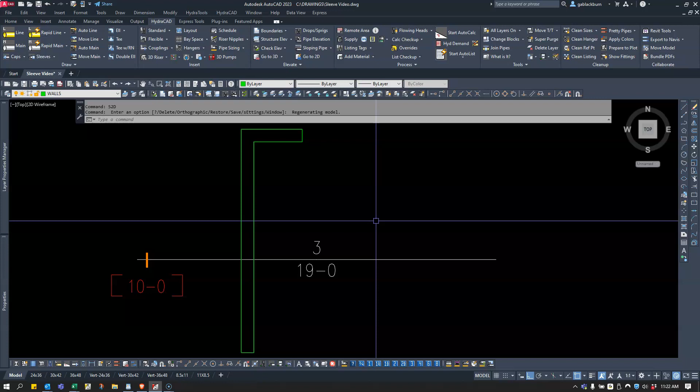And show you how to have something show up while you're in 3D and you go to your BIM model and everything. So I have a drawing here. I want to first draw the 2D sleeve.

To do that, you're going to go to the hangers toolbar. That will load this one up, and then we're going to pick this button, fourth from the end. First off, it's just going to give you a couple bits of information telling you that if you adjust it, you have to just do a regen, and because it's dynamic, it'll update automatically. So that's what that means.

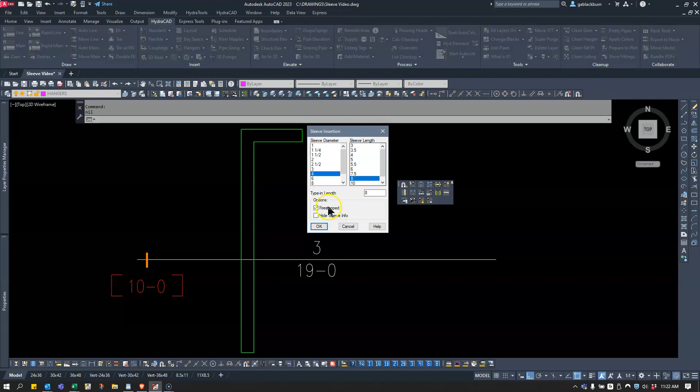First question on this column asks for the sleeve diameter. I assume we would go with a 4-inch sleeve diameter for this, and the width of the wall is 8 inches, so that's why I have 8 inches selected here. I have the firestopped option turned on, and when I click OK, it will ask me to select a point where the sleeve is going to go.

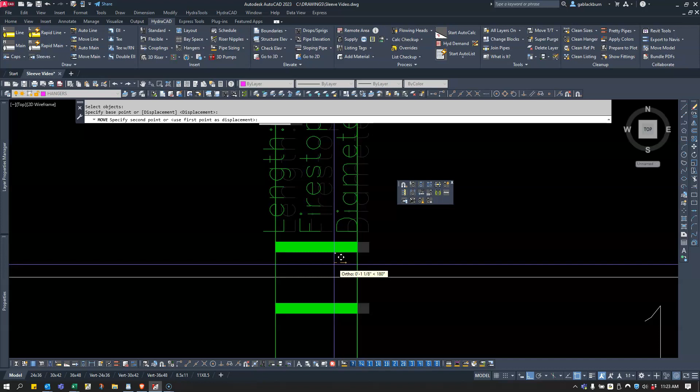So I'm going to try to find the midpoint of this pipe here. I'll guess about right there, and I was off a little bit, but all I have to do is if I want to center it up, I can just kind of grab this and just move it over, and I make sure that my ortho is turned on, and now it draws everything perfectly.

You can see the dynamic information here. It's telling you that length is 8 inches, the firestop is answered yes, and the diameter is 4 inches. So you can see that information there. And again, as you adjust values, doing a regen will update this automatically.

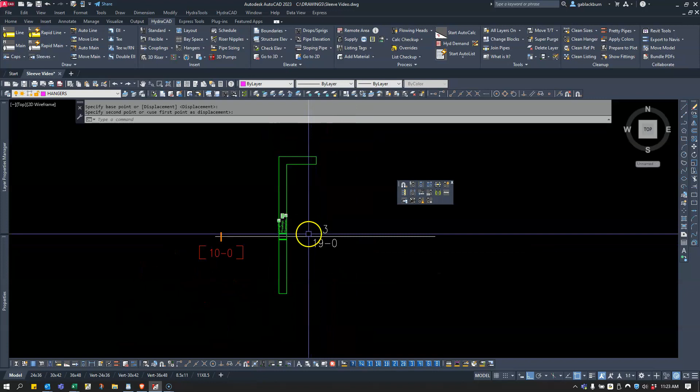Now, this doesn't help much because you can see we have this 19-foot long piece of pipe. It's elevated to be 10 feet. Let's see what this looks like in 3D. So I'll type in S3D and it will raise it up to 3D.

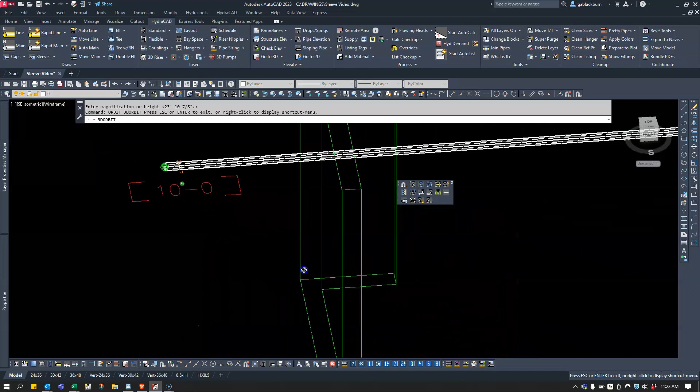And you can see our sleeve is still showing on the floor because again that was a 2D sleeve, and our pipe, we don't really see anything different here. If I orbit around, nothing to represent a sleeve. So I would say that we have to do something to be able to show an object in 3D so that when you make your BIM model, you would be able to see your sleeve show up there.

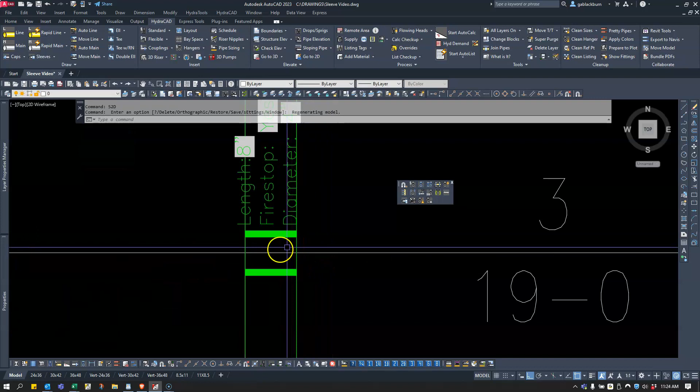So let's drop it down to 2D. I'll type in S2D, and here's the trick to get this done. I'm going to draw another piece of pipe. Now it can be any layer that you want.

I'm going to just draw it in the underground layer so that way it shows up a little bit differently. We're going to have some blue pipe here, and all I want to do is draw a line that represents where the sleeve is going to go. So I'm going to draw a line that starts from the intersection of this wall, and I'm going to draw it to the intersection of that wall, and I'm drawing it right on top of the existing pipe.

Now, this technically won't work. If I try to make a 3D model, it'll tell us that this 8-inch underground pipe is not being raised up to 3D. So let's change that.

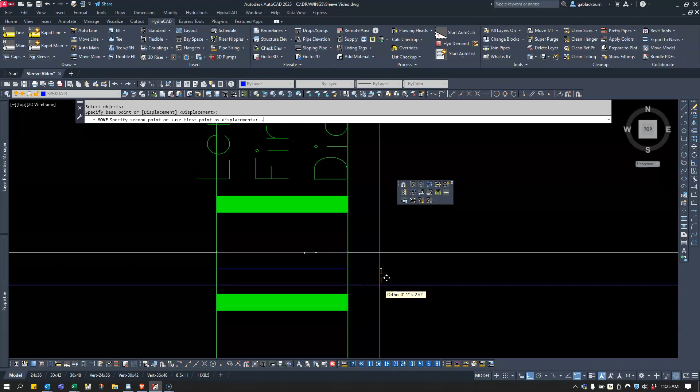Now, the problem is I can't have these two pipes drawn right on top of each other. So what I plan to do is I'm going to move this pipe south by about an inch, 1 inch, and now I have my blue pipe drawn next to my white pipe.

So this is just to give an estimate of where the sleeve is going to go. It doesn't have to be exact. We're just trying to show that there's something there.

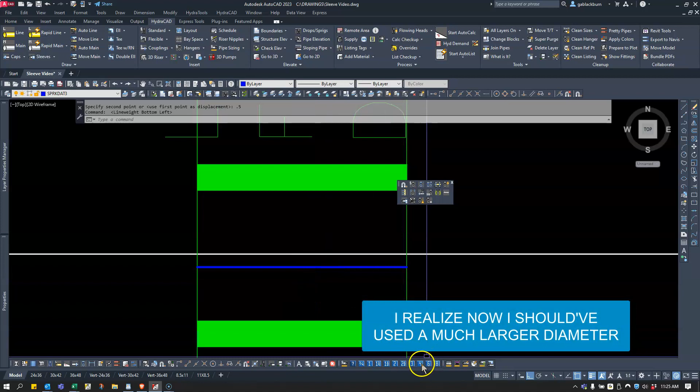Next, I'm going to size this pipe to be a 4-inch diameter pipe. We can see here it's 4-inch diameter, 8 inches long, and I need to elevate this pipe too. So I'm going to type in AFF, tell it the elevation of that pipe is 10 feet, and click insert.

If I draw the tick mark across both of them, this tick mark will be the same as that one and both will get elevated, but I like the positioning of this. I don't like this right on top of it. It's getting very congested in this area.

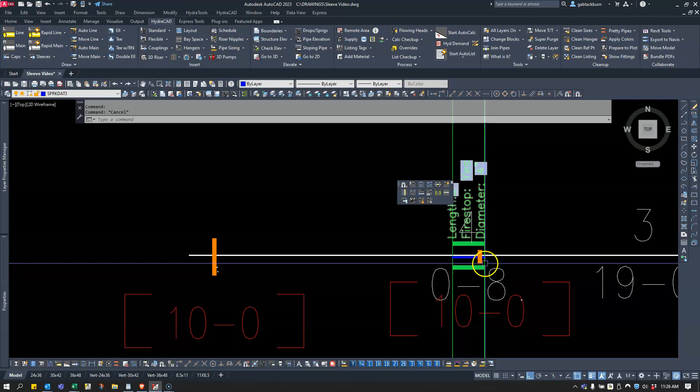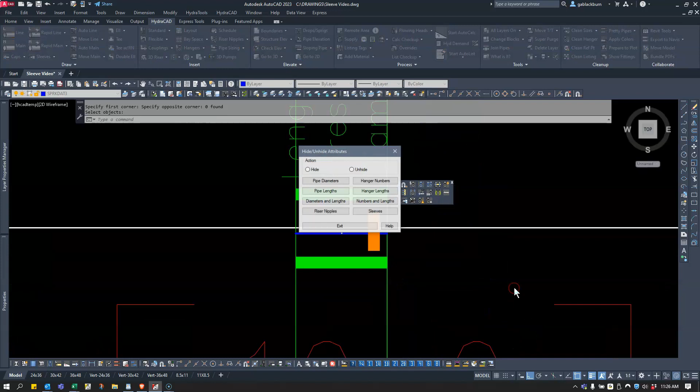So let's do a couple things here. First off, I can hide this text using the command HAT, for hide attribute. I'll tell it I want to hide both the diameter and length of this dimension, and when I hit enter, it goes away. It hides it. So it's there, it's just hidden at the moment.

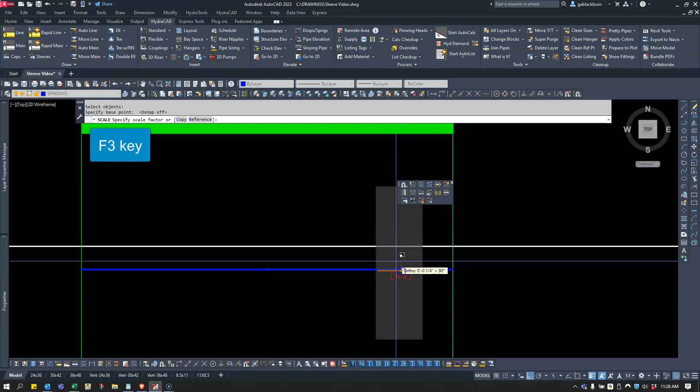Secondly, I want this to be scaled down much smaller, especially I don't want it touching this white pipe. So I'll use my scale command, tell it scale, this option, and we'll go from here. Let's turn off my O-snaps and we'll go like this, making this about that wide, so it's only touching the blue pipe.

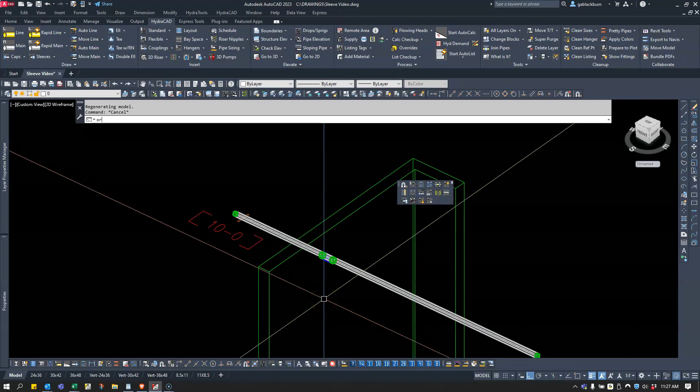And when I make my 3D model, if I show 3D, we'll see that there's a little blue marker, that represents our sleeve. If I orbit, it'll only orbit around that one object. But if I orbit again, we'll see that it's moving along with the pipe, and for all intents and purposes, it looks like it's right on top of the pipe.

If you zoom in real tight, you'll see it's off by half an inch. But, you know, like I said, we want to show that there's something there.

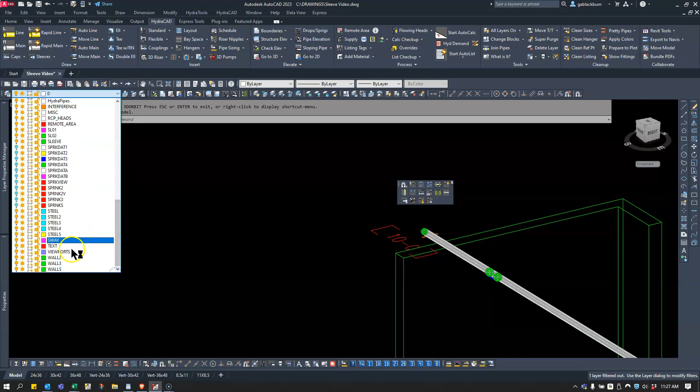I'll go to an X-ray view here and isolate this layer, so lay ISO, and I'll lay ISO this and this. I was trying to hide the fitting object here, but let's just delete it for now. Again, you can see here, if we turn on our X-ray view, that there's something there.

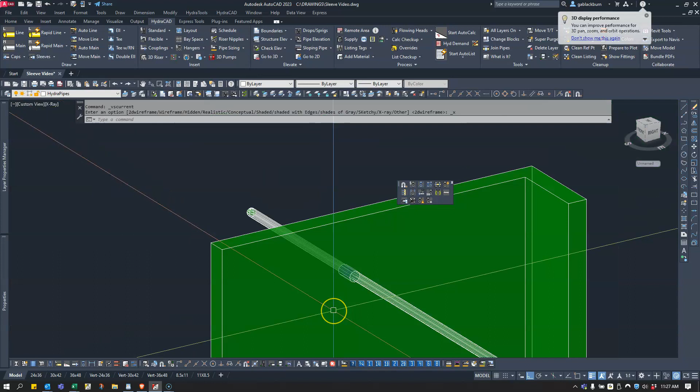All right, so that's how we're going to show the sleeve in CAD. And now if I make my 3D model, I'll save my drawing and export to Navis.

That's probably okay because we don't have any heads there. I will now open this drawing, file open, and go to my sleeve video drawing.

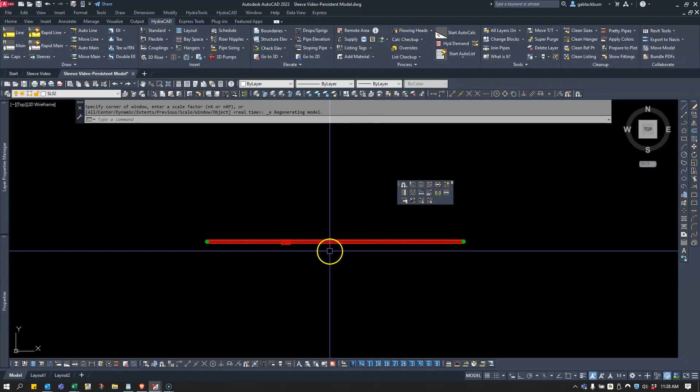I'll export, and it does show, you know, obviously when you export your BIM you're going to get all the pipe. But if I orbit around here, you'll see that it shows the sleeve sitting right on top of it there. There's no walls that I exported, so that's why we can't see the wall, but you'll see that there is an object there for you.

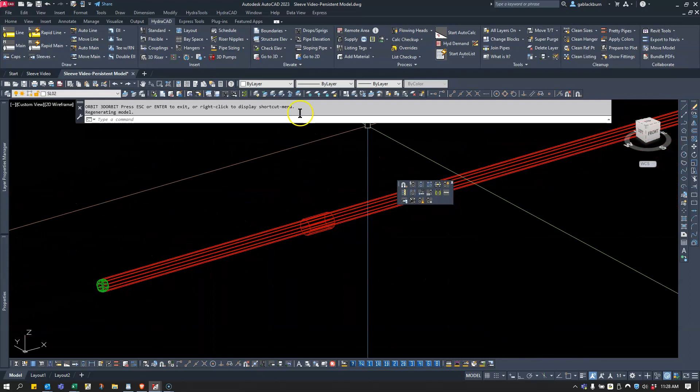Okay, so I hope this video has helped. If you had that question and wanted something to be able to represent a sleeve in 3D and in BIM, this is what you can do.

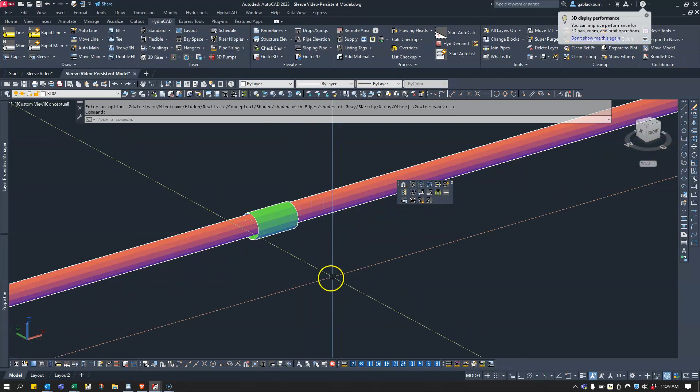I think I would also, if anything, maybe change this to say green or something, and then let's go to a conceptual view. There you go. You can kind of see that there's something over this pipe here, and that's it.